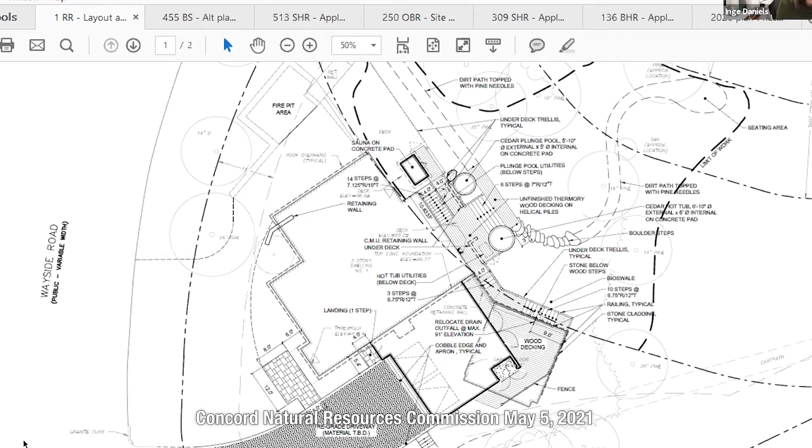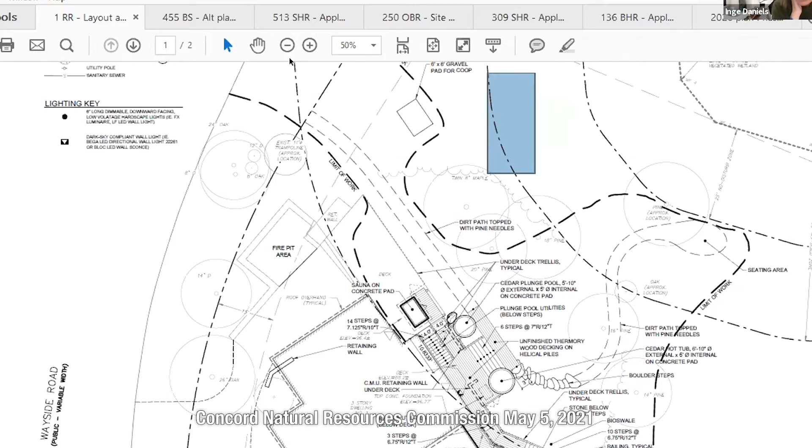There was a question regarding lighting. If you scroll up slightly, you can see the lighting that's proposed on the left-hand side, the lighting key. So we have lights on all the deck steps for safety. Those are downward facing, low voltage or dimmable hardscape lights. And then just a single dark sky compliant sconce on the back of the house.

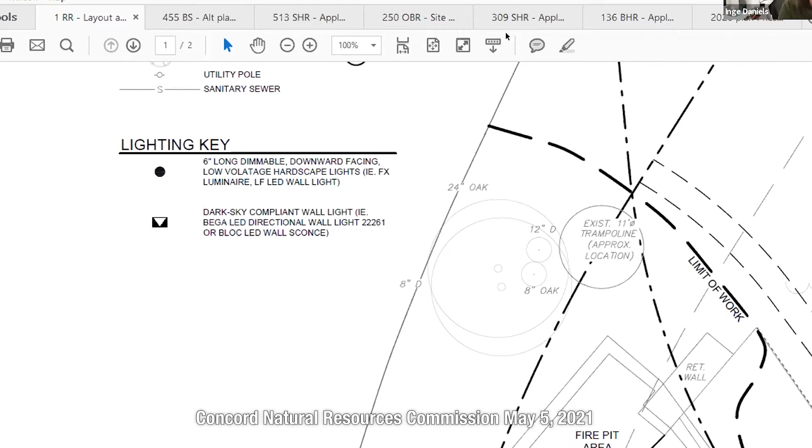Okay. And then I don't know if there are any questions regarding that. Otherwise, the other questions are addressed on the second plan. I apologize, Inge, I don't have your second plan up. Ooh, okay. So if you want to just speak to those changes. I can do that, or I can share screen, whatever the commission prefers. Yep, hold on one second.

Okay, so you should be seeing that now. So we were asked to delineate where we are finding invasive species. I realize there are a number of different colors and hatches and lines going on here, so I'll try to clarify those. The red pattern effectively is showing the invasive removal areas, which is not to say those entire areas are covered in invasives, but those are where we spotted them.

This area does show probably a pretty full extent, and that is multiflora rose. There's buckthorn in these spots and throughout this area, as well as oriental bittersweet and some burning bush. But it is not heavily - there's not a heavy presence of invasives.

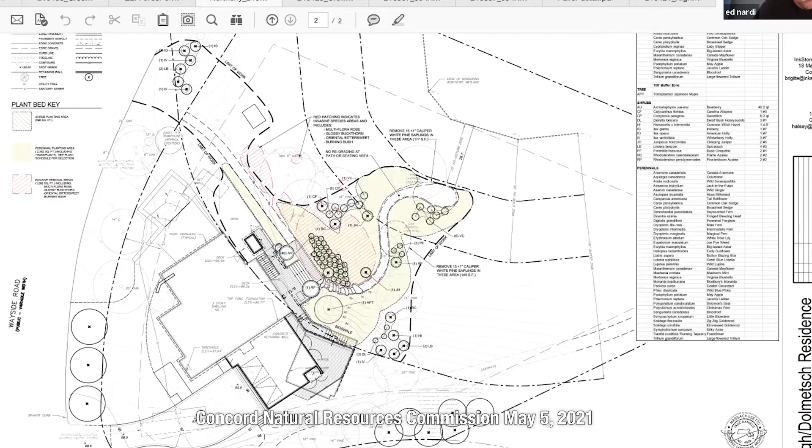I'm just trying to see if there are any other questions we were asked to address. We adjusted the white pine sapling areas so that it was very clearly outside of the 25-foot no disturb zone. Were there any other questions? From what I can see in terms of the notes, it seems like that captures the questions that were raised last time.

Great, great. Ed, could I ask a question? Of course, sure. Inge, can you stop sharing your screen? Yeah, thanks.

So this is a question from when we went down and looked at this wetland boundary for the first RDA - I apologize, I'm just remembering this now. This is the edge of the pond, essentially the edge of the wetlands. I think from the prior homeowner, there are some trees that have lights strapped to them that are projected onto the pond. Are those active lights?

I don't believe so. Okay, could those be removed? Those could be removed, I will check that with the owner. I don't believe they're active. Let's see, so...

Commission, do you want to consider making that an additional condition on this, to have those lights removed? I know the Commission is ready to issue the permit tonight. You may not have had the opportunity to speak with your client, Inge, about this, but there's no benefit to the wetlands and the wildlife to have this pond be lighted.

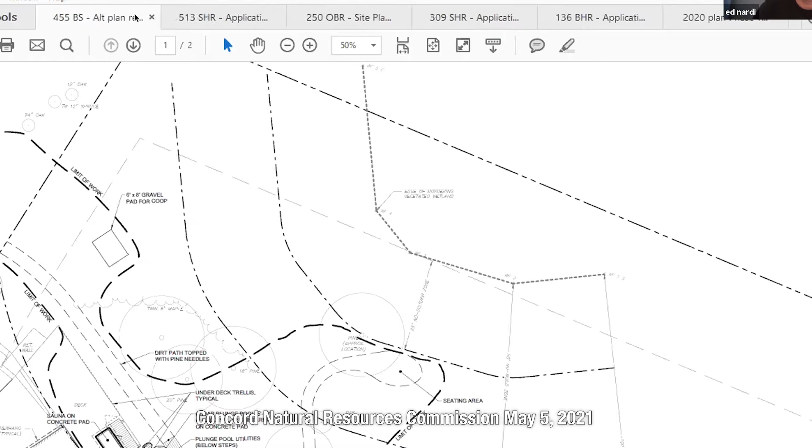New applications. First one up, notice of intent, 455 Bedford Street, DEP file number 137-1561. Let's see. Oh dear. And is Kristan First?

Yes, Kristan. Good evening. First. Hi. That wasn't the drawing. Hi, Kristan. I'm sorry, I closed yours mistakenly. Let me just open it and you can go ahead and start introducing the project.

My name's Kristan First. I'm a landscape designer, and I'm speaking on behalf of the owner of 455 Bedford Street, Stacy Mock. The purpose of this project is the construction of a new pool and patio. It will also involve the removal of invasive species adjacent to the wetland, replanting the area with native plants, and establishing a more robust planted buffer between within the 25 and 50-foot no-build zone.

The majority of this property lies within the 100-foot buffer zone, identified by the bordering vegetated wetland boundary. The wetland, which is town of Concord land, was recently delineated by David Burke, and it is predominantly a cattail marsh. The adjacent wetland is also listed as an estimated priority habitat of rare and endangered species, but this designation stops at the property line.

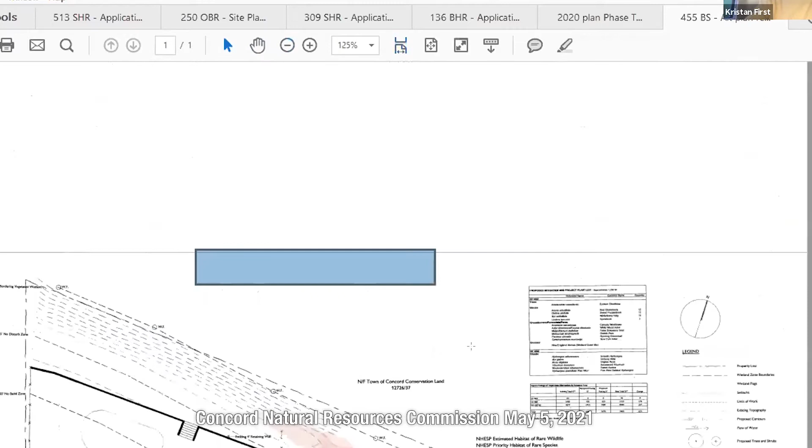We did explore several alternatives for locating a pool. We were limited by setbacks, 15-foot setback on the side and a 20-foot setback in front. There is an existing septic system in the front of the house. So the 2 areas we were looking at for locating the pool both involved some impact of the 50-foot no-build zone.

So we're looking at this project as a replacement and reduction of existing site interventions in the 50-foot no-build zone. So what you're not seeing here on this plan is the existing conditions on the site, but can you see my cursor at all, Delia, or no? If you want to share, go ahead, Kristan. So you'll have to open it if it's open on your screen, then you can share it. Okay, not that one. Sorry.

Okay, what I'll do, I'm just going to share sort of an existing conditions drawing. See if this will work. Sorry, I'm not as familiar with this. I can pull that up for you. There, I have this. Share.

Okay. These are sort of the three areas we looked at. Our initial proposal to you was looking at this area over here, but now as we're presenting, we're looking at this area here as the preferred alternative. But as you can see, both of these do lie within a portion of the 50-foot zone, but there's an existing driveway here that is quite large. So now we can go back and look at your drawing.

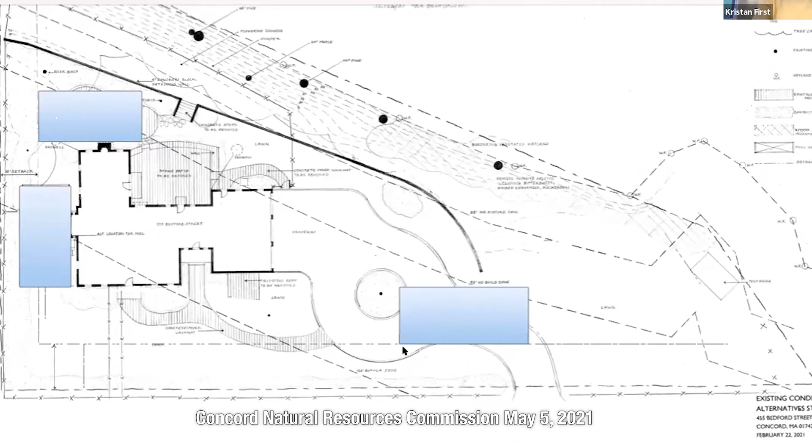Okay, so we've located this here. The pool sits exactly at the 20-foot setback, and just a corner of the pool, the patio, lies within the 50-foot no-build zone.

And then we're significantly reducing the size of the driveway in the 50 to 100 foot area, and the pool lies within that area. Another thing to consider is that the structure of the pool itself lies outside the 50-foot no-build zone.

Although this plan involves a reduction in impervious material, we're still proposing an extensive mitigation plan. Currently, the lawn rolls right up to the top of the bank, into the 25-foot no-build zone. We're proposing removal of invasive species, including barberry, winged euonymus, multiflora rose, buckthorn, and a large patch of Japanese knotweed.

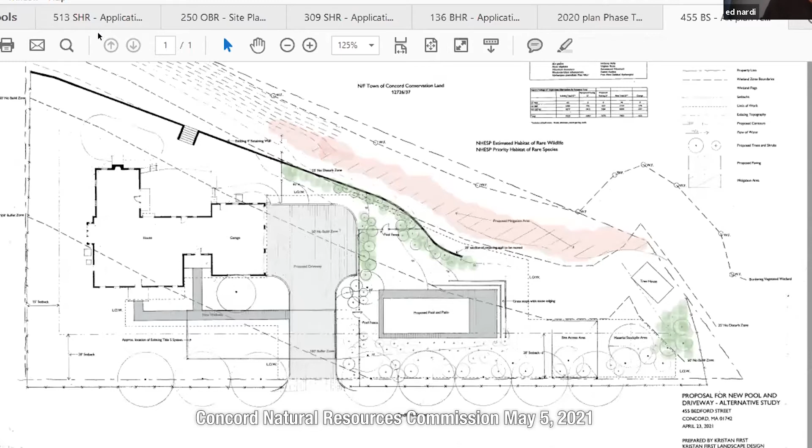Jeff Davis. Good evening. So I am here, as mentioned, for the request for determination of applicability. I should say, I'm Jeff Davis at 513 Strawberry Hill Road. Thank you.

I'm looking at the southeast corner area. It's a low-lying area, and we're trying to get this determination on whether there's any connection with the jurisdictional wetland that borders the property on the south. We had Hancock Associates evaluate that area, and they determined there is no connection, which is why I'm here. Thank you - I didn't have any particular comments on this application. Any of the commissioners?

Any public comment regarding the application?

From a staff standpoint, we confirmed that there is an isolated basin that has wetland soils and wetland plants. It is separated from the bordering vegetated wetland by an upland strip. There was no hydraulic connection observed between the two, confirming that this would be an isolated wetland.

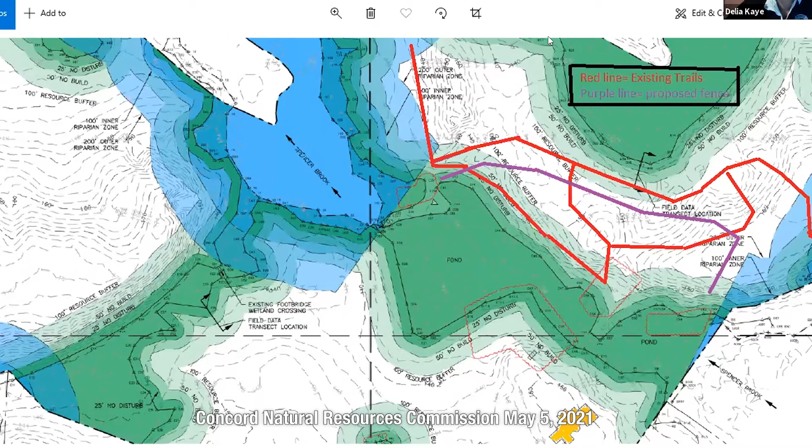Any commissioners have any comments or observations? Anyone from the public have any comments in regard to this?

I would make a motion, and I thank the landowners for keeping the trails open to the public. Yeah, exactly, thank you.

I move to issue a negative determination... we need a fence in here, you need the dog whisperer, I don't know if he trains, he must have just eaten dinner. I make a motion to issue a negative determination numbers 2 and 3 for RDA number 21-8.

Have a second? Thank you, Nick. We'll take the vote: Nick, aye. Judy, aye. Greg, aye. And I am an aye as well. Thank you, guys, appreciate you showing up and taking care of the fencing and the trails. Thank you.

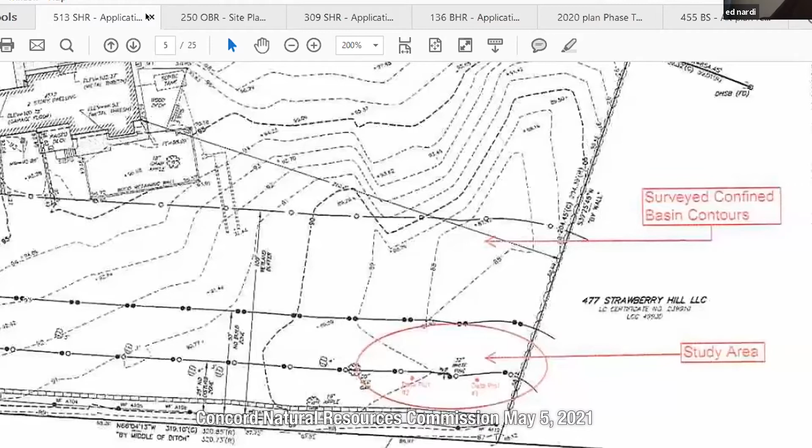Obviously this is a new development, and it seems like there are a lot of components to it. I'd offer some advice that any public comment be limited to the NRC's purview. There are a lot of different pieces, and different departments like planning, DPW, et cetera, will be opining on other major components of this application. So with that, who'll be presenting this evening?

Hello, Molly Obendorf for the record with Stamski and McNary. I am also here with Pat Nelson, Executive Director of the Concord Children's Center, and Brooke Cash, one of the landscape architects for the project with Lemon Brooke. Brooke actually has a slideshow, if we could pull that up.

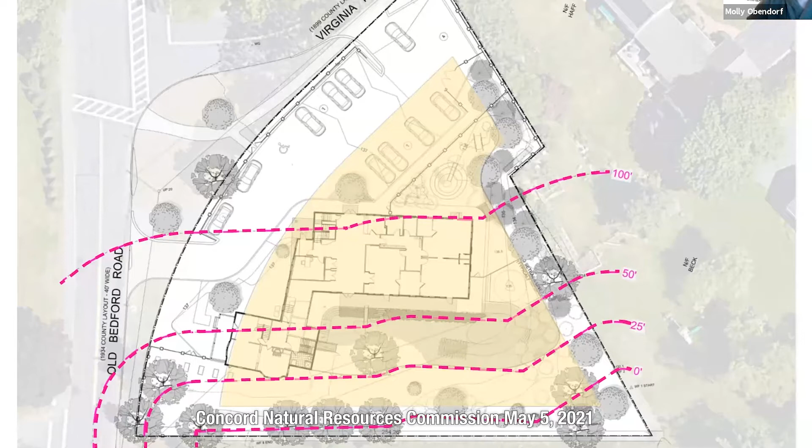We are also proposing a significant amount of plantings across the site—Brooke will get more into the planting restoration. Here you can see the infiltration chambers underneath the parking lot, shown as dashed lines. Those are fully outside the buffer zone, but worth mentioning because the building is within the buffer zone and we're capturing the entirety of that roof runoff. So in terms of stormwater, it'll actually be an improvement to the site, mitigating that runoff over land.

And then I will just brief over the open space areas, and I'll let Brooke get into more detail with that. But the site is constrained. We have the wetlands and we're trying to fit the building and the parking lot on here.

So the remaining open space is mainly being utilized for play space. There's a play space in the front, in that triangular area between the parking lot and the building, and then there's play space in the back. The site is handicap accessible, so there's a ramp in the back down to the play space area that makes that area accessible.

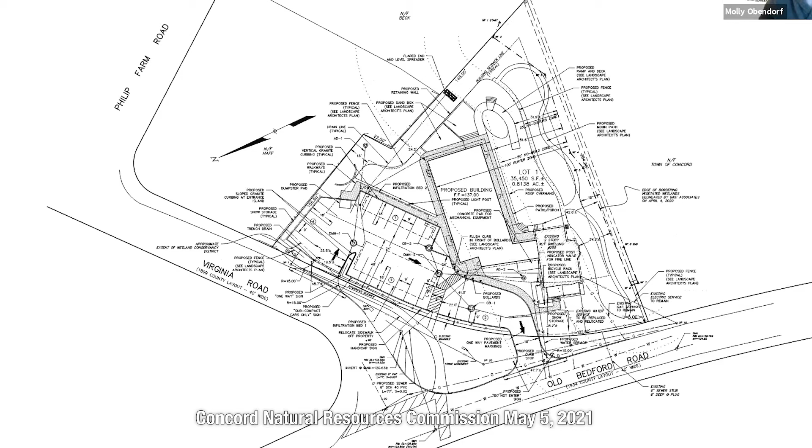Between the edge of the wetland and the 25-foot, as I mentioned before, this is fully disturbed. It's all lawn. Brooke and her team at Lemon Brooke have put in a very thoughtful amount of time and consideration into restoring this area, not only this area, but other areas on site as well. Particularly this area that is currently disturbed will become a natural meadow with a small mown path, a nature path for the kids where they will be escorted and safely taken through the site. I'll hand it over to Brooke to get into the plantings.

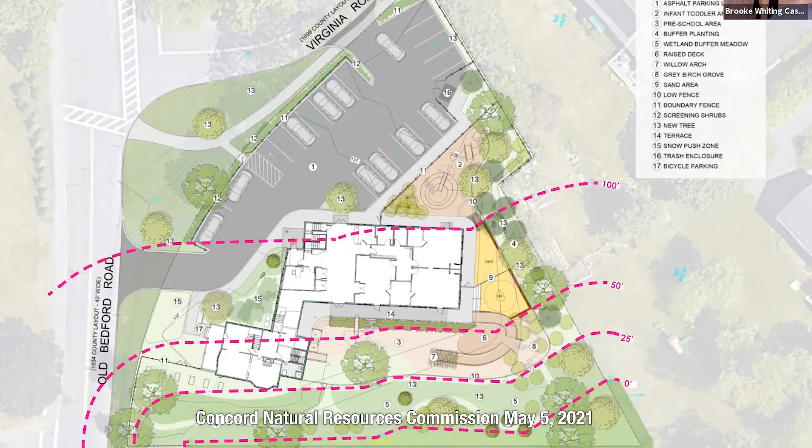We've worked hard to come up with an entirely native planting palette that helps provide educational opportunities, satisfies the buffering concerns for the neighboring properties, but also looks to restore and rehabilitate the wetland resource on the project. As Molly said, it's entirely lawn and tall trees at this point. The lawn does even stretch into the wetland itself.

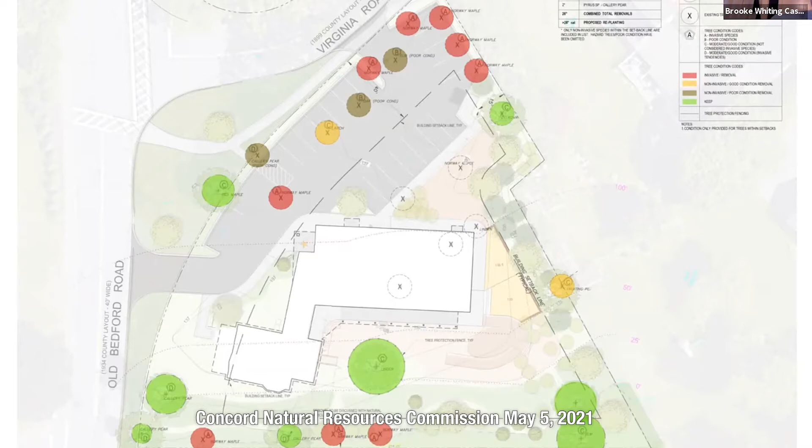We are trying to provide some woody planting in this meadow area to break up and provide additional habitat resources, but managing a lot of woodies interspersed in a meadow area is difficult. We have a lot of experience establishing seeded meadows.

It's not easy, but we're pretty well versed in what it takes to do that. So the intention is that that would be a native New England flower and grass meadow, mown probably once or twice a year to keep woody invasives out as a management strategy, with a mown path through it. The location could be set or flexible if you had a preference. The idea is to provide an opportunity so that supervised children could be taken out in small groups and walk through there.

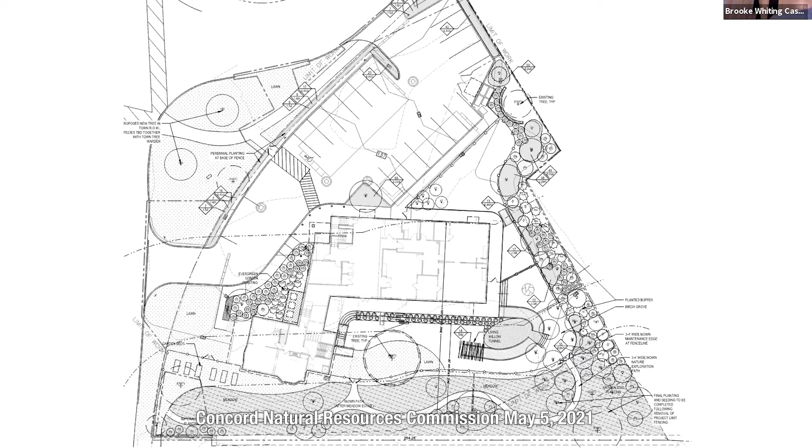We've put in plantings that have different leaf shapes, different kinds of bark and berries, and different opportunities to teach the children from the plantings in the landscape. This is not an extensive list. This is the trees - I have another slide with the shrubs - but it's all native material.

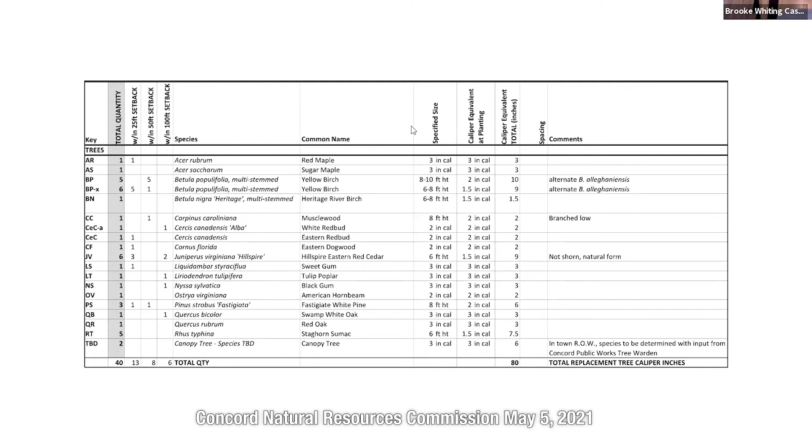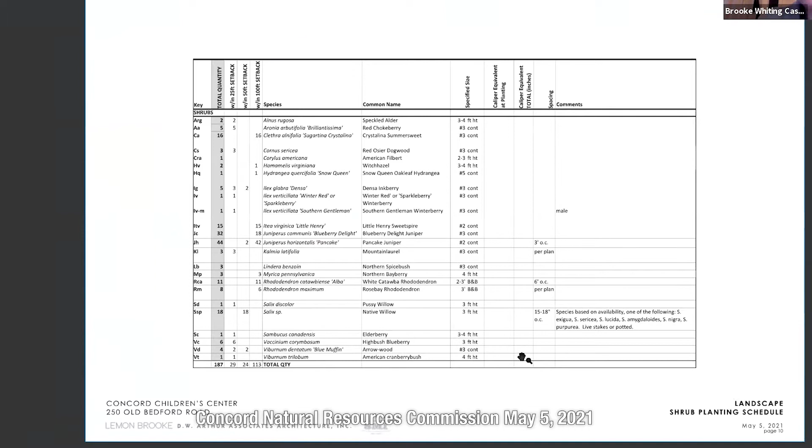We've gone through to compute what's being planted within which area of the setback, and - excuse me, sorry, another computer malfunction - we've gone through to do a tabulation of replacement caliper inch as well, and we are far exceeding the number of inches of caliper that we are removing outside of the maples. Again, I am having computer issues.

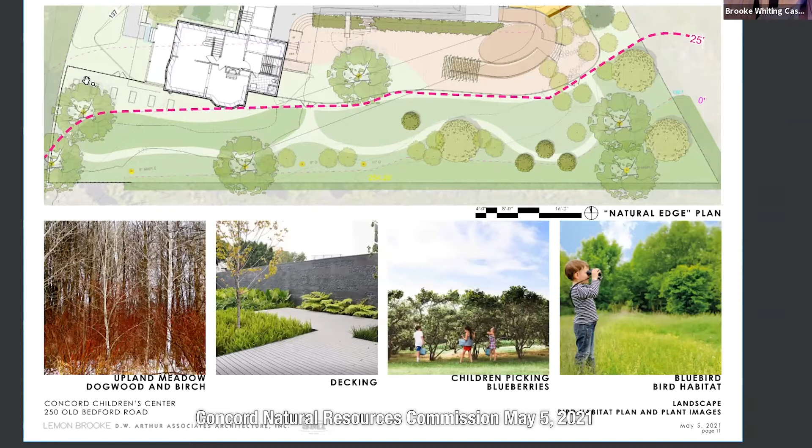This is outside of their play area, so this would be a limited use, supervised only, small groups of children. That's what these rectangles are here.

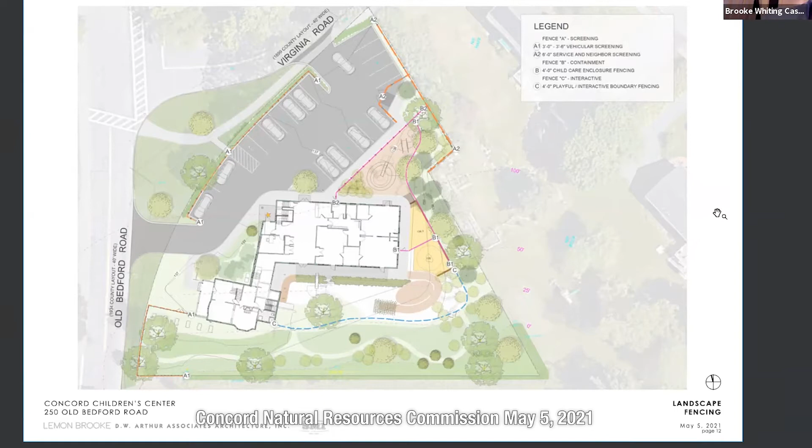And then this is about the fencing. This was a slide produced for planning. Really the fence that is of greatest impact is this blue fence C, which is along the 25-foot, just outside of the 25-foot zone. And then this one marked A1, which at this point we are considering to use the same fencing material as C. The primary intention of that would be split rail with a coated wire mesh on it.

One issue that we do have with the fencing requests or requirements of the NRC is lifting the fence off the ground, and there is an entrapment issue with small children with that. So that's not something we believe we can provide - that gap at the base of the fence - based on childcare licensing requirements. So that's an issue we want to be upfront about and get out there, because there are child safety issues that prevent us from providing that gap under the fence.

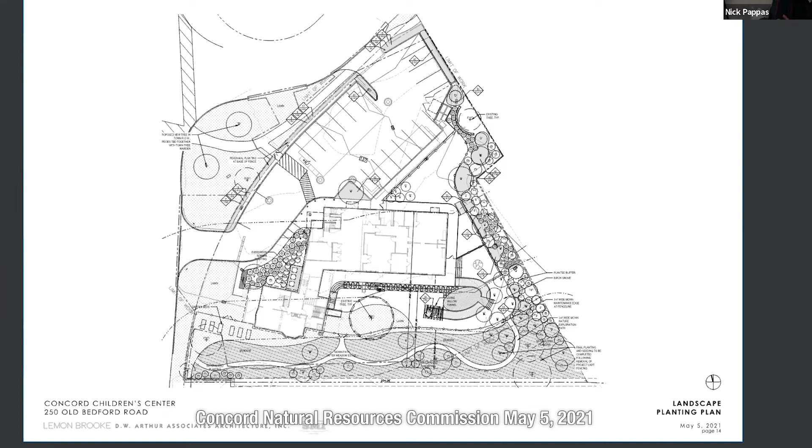My primary concern is about the extent of the impervious area, including the building and the parking area inside the 100-foot buffer. This area has a long history of flooding and failed septic systems that led the town to agree to extend sewers into this area, and that's a concern with that much impervious surface. I heard that something would be done to allow water to infiltrate, but given the history, and given that there were drainage ditches there to deal with this problem that don't function anymore, I have concerns about that.

I can speak to that. Runoff over impervious area is always a primary concern, which is why we're mitigating it. There's always a concern of increasing the groundwater table, but it's the same amount of rainfall on the same amount of area - it won't increase any existing groundwater problems or contribute to existing issues. The drainage structures are holding our distance to groundwater, any required setbacks to property lines and buildings, to provide a safe means to infiltrate that water and have it percolate into the ground properly. So we are abiding by all the regulations and mitigating the increased impervious area with those structures.

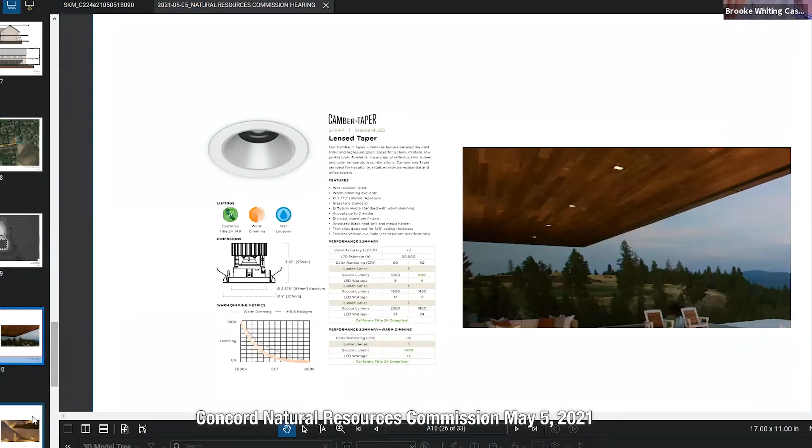This slide shows the soffit lighting, that's where we have porches. And then this is the lighting for egress where we do not have a porch to light down from. So these are all full cutoff fixtures, and they really are not projecting light very far at all beyond where we need it for safety.

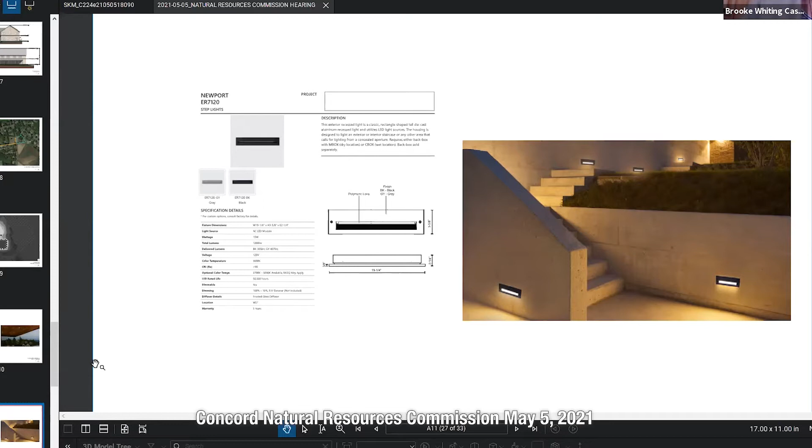Is there an intention to operate this after dark? Or what time? In the wintertime, how late does it run? They're open until 6:30... actually, no, we're only open till 6. So there may be cleaning people or others there later, as long as there are people occupying the building, even if it's for maintenance, for safety egress we do have to provide the lighting around the building edges, but they're not there all night.

There's an opportunity to set some kind of programmed schedule. I would imagine, speaking with the architect, that would be possible. So the lighting will have a timer ability to set back after hours. It can, it hasn't been designed yet.

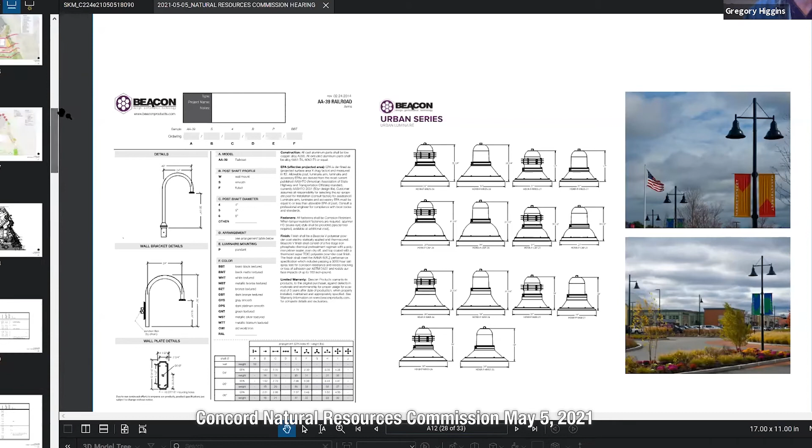One more question on the drainage, the roof drains and that. I'm sure you used conventional authorized calcs, but we know from experience that you have flash floods and heavy rains. Do you have an outfall for those structures should we get a deluge of two inches in an hour? And where would that water go?

Yes, so there is an outfall, let me go to your plan that has that. So there's, yeah, right there. So that services the larger infiltration bed. Engineering did have a comment to provide one also for the smaller one that's servicing the roof drainage. So this will overflow into this level spreader, so it's not just a pipe discharging. It's a channel, for ease of words, that will fill up and then slowly overspill, and then eventually go into the wetland.

And I'll add that there's significant treatment for all of this runoff from the parking lot. There's about 90% removal of total suspended solids before it even enters the infiltration bed, and the infiltration bed provides additional treatment on top of that. So whatever outflow comes from that overflow pipe and level spreader will be fully treated, clean water, and it's right outside the 50-foot there.

This is somewhat related to drainage, but also just the amount of coverage on the lot, specifically in the jurisdiction. What was the basis for the sizing of the building and the parking lot?

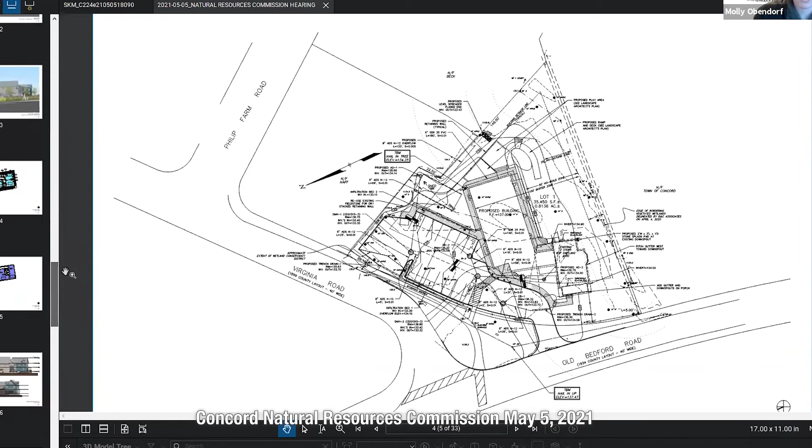And then the size of the building, maybe Pat could speak more to this, but I know there are specific sizing requirements for classrooms and providing a certain amount of space. This is actually a smaller building than what was originally considered, so it's already been reduced in size to the absolute minimum extent that it can be.

So maybe to that point, it might be helpful to understand how this proposed building relates to the existing programming at the Concord Children's Center. If this is an expansion, similar conditions, or a reduction, that would be helpful for me to understand. What's going on right now?

This is the program currently at Ripley, 0.2 miles down the road. The school district has decided they need that space and is no longer leasing it to the children's center. So the children's center looked throughout town to find a property that could suit their needs, and this is a build-to-suit facility. It is no expansion of additional children.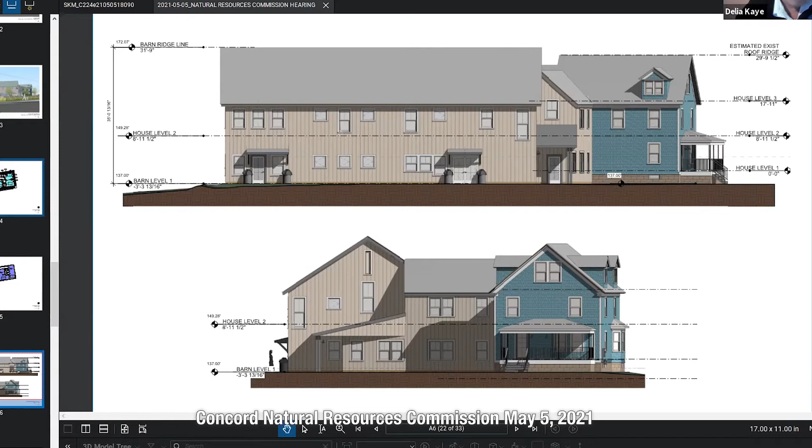Okay, so I think it might be helpful just to understand - I only ask this because there is that intrusion into the 50-foot no-build zone, and I saw your architecturals with the spacing in terms of, is it 45 for, I don't remember what it is for different, 42 for different, preschool, COVID, whatever it is.

But let's not look at COVID. Let's look at what it is going to be in reality, hopefully, knock on wood, very soon - what those numbers are for how many students you have.

I think if there's a way to reduce the amount of massing that you're bringing into the 50-foot no-build zone with that very small accessible entryway, that would be great. It would be helpful to have that on the next submission.

I'm not totally understanding the differentiation. If you're going into the no-build zone, we'd like to see an alternatives analysis - is that a necessity, or is there another way of finessing that so you don't have that incursion into the 50, or as big a one?

Right, and I think that's what she's driving at - is the quantity of children the same, and is the size not expanding beyond what you currently need, so that you're not expanding your program? Because if that were the case, that would be a way of mitigating going into the 50 - you could make the building smaller. So just take a look at whether there's a way to take that out of the 50 or reduce it.

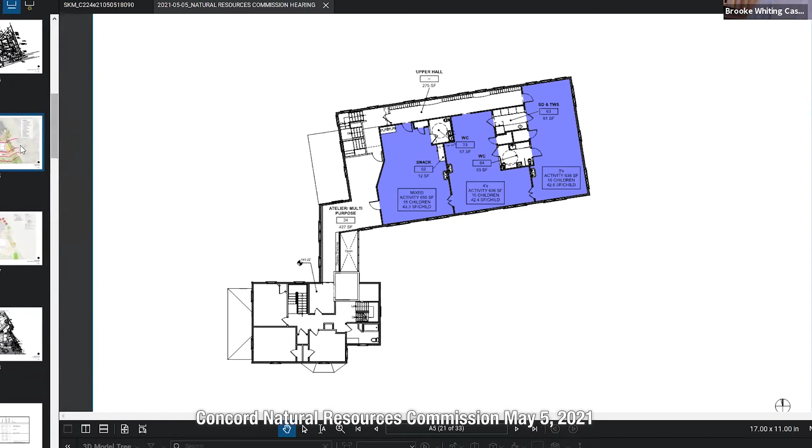Right, so let me go back to the landscape plan - the accessible entrance is in the 50. That's correct, and all of this is being driven by the size of the building and the size of the parking lot. So the commission's interest is not having new incursions into the 50.

Right, we understand that. The size of the ramp is not related to how many people are in the building - it's related to how much grade change we have to make up, and how long of a ramp you need to meet ADA.

But could the ramp take a different configuration, starting at a different edge of the structure? If the structure were smaller, you'd have less ramp going into the 50 - it's just geometry. And the ramp could also take a different configuration outside the 50, towards the back of the property.

The issue is there's designated play space that's required - there's a square footage per child for play space required. Moving the ramp or deck would take away from that play space. And I don't think reducing the building is an option - it's pretty much at the minimum required size needed for this program.

But I can just leave it at - Brooke and I can definitely look at the ramp, see if there's any way at all to minimize the encroachment into the 50 ever so slightly while still functioning as an accessible route. Right, you may find there's nothing you can do about it, but you do the alternatives analysis and come back and say we tried this and this, and it didn't work.

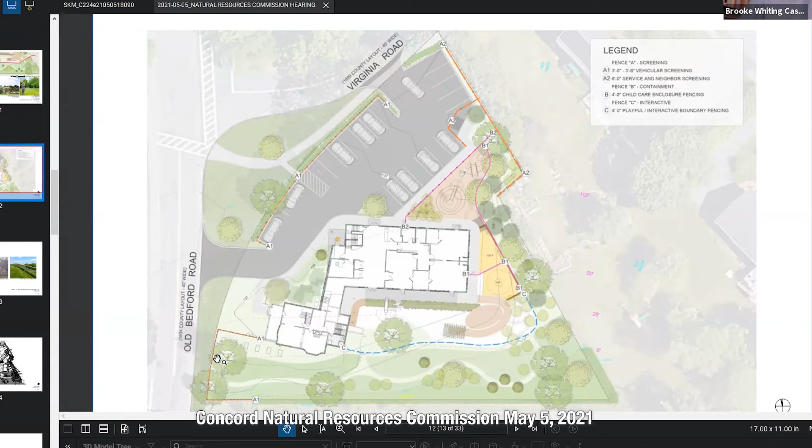Can you also potentially look at pulling that up so that the bottom part on the south side of the lot—if you could pull that up—I think that's in the 25-foot, if that doesn't need to be there.

The interest is at where the label A1 is—that's really where the ditch starts. That's a very visible signal to the children that you don't go beyond there. What we're trying to do is provide a very clear, unambiguous boundary for children, who would be in small supervised groups, but out in this area, they're very small children, and Old Bedford is a busy road. So that's been the interest in trying to return that piece of split rail fence back.

So what if you flipped that fence and came off the back side of the building to the east, to the right of the gardens? You know where the gardens are—those are the rectangles here. To the right-hand side of the gardens, you have the fence on the right-hand side of the building. You start it up at the gardens and bring it to the left and down to that point, so there are ways you could look at the fence and keep it out of the 25.

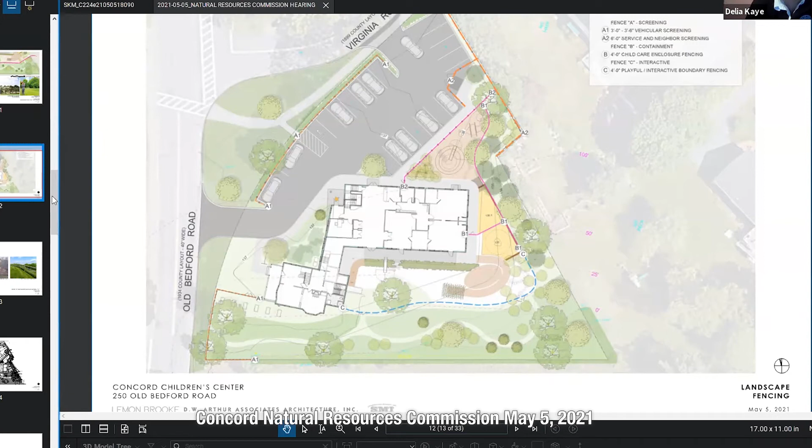So that is included in the plant schedule, the replacement values. Are you interested within the 100 or just within the 50? Which trees are being removed, the 100? I can go back to the slide.

So that's, I think, what Judy's looking for is an arborist's recommendation on why those trees are coming out, because there's a lot of X's on the plan, but not a lot of justification for why. So this is the 100-foot boundary here.

So these three trees are within the building footprint. These are Norway maples. We don't have to take them out. We're offering to take them out.

So just to provide that, Brooke, in writing would be really helpful to have for the record. Okay, I think that's somewhere in the narrative, but Molly and I can confirm that.

And then this is a fruiting pear that is in the location where the level spreader is going to go, and that's why that one would be coming out. Okay, well, we'll put it in writing and provide the chart as well. Thank you.

So we'll move to the public comment. Any public comment on this application this evening?

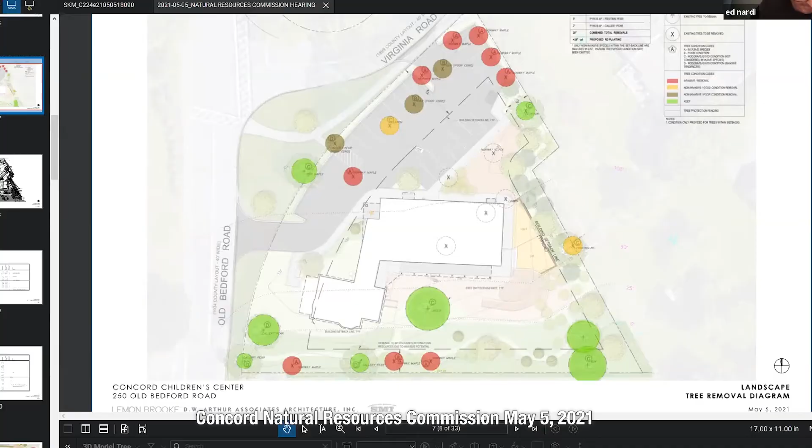Hi, this is Michelle Beck. Can you hear me? Yes, Michelle, name and address, please. Sorry, we are at 26 Philip Farm Road. Thank you. We're the direct abutter behind.

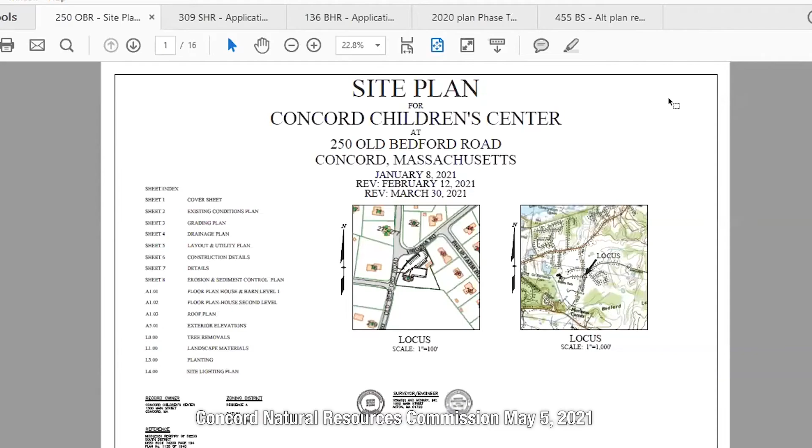We have some commentary on the scope of the project with the large percentage of impervious surface. I'd like to better understand the distribution of space types with the existing home compared to the addition, and how that relates to the space types from the locations they're moving. For example, the existing home seems to be proposed to be used largely for administrative purposes, as opposed to programming purposes. Is that consistent with the previous location? And perhaps if the building could be smaller, you could address some of the encroachment on wetlands.

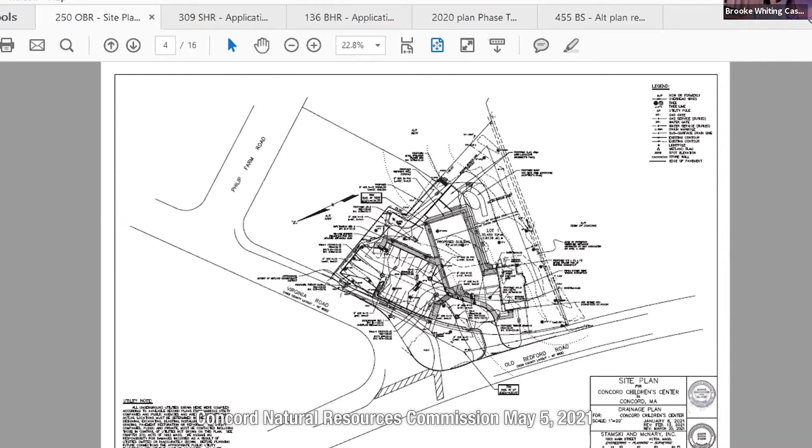I'm not the architect, but I can respond generally. Egress requirements and access requirements make it very difficult to use the existing building space for children's programming. That's why the majority of the classroom space, primarily occupied by children, needs to go in the new addition.

There's also, initially before COVID, our plan was to have a small after-school program on the first floor of the existing farmhouse so that it would be program space. It's up in the air now as to whether we'll be able to provide an after-school program, depending on whether the public schools will still transport children to the nonprofit programs after COVID. So more than you need to know, but that was part of the plan, to use the first floor for program space.

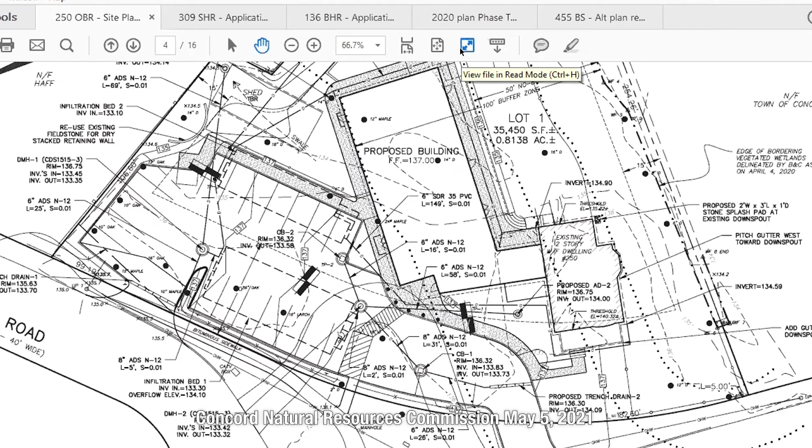My second comment, going back to, I'm not an environmental engineer, but where the flowering pear tree is and there's that water egress for overflow, you're removing the flowering pear tree, and the water overflow would go into our backyard. That part is higher than the rest of our yard, and the Haffs who live next door, their backyard is higher than ours. Every year at this time we have large puddles of water right behind our house, so I'm concerned about that egress of water into our yard. I'd like some better understanding of how that impacts the yard, given the large impervious spaces. I know the lawn is worse than the excellent plantings proposed, but I was curious to have more information.

Yeah, I can speak to that. There is a natural swale along that property line, and we're not raising the grade in that area. So I'm sorry to interrupt, but can you put that in lay language, I'm a healthcare person, not an environmental person, so I don't understand. So there's a channel essentially along the property line. It's natural, currently we're maintaining that channel, and we're not increasing the grade in that area enough to affect the abutting properties.

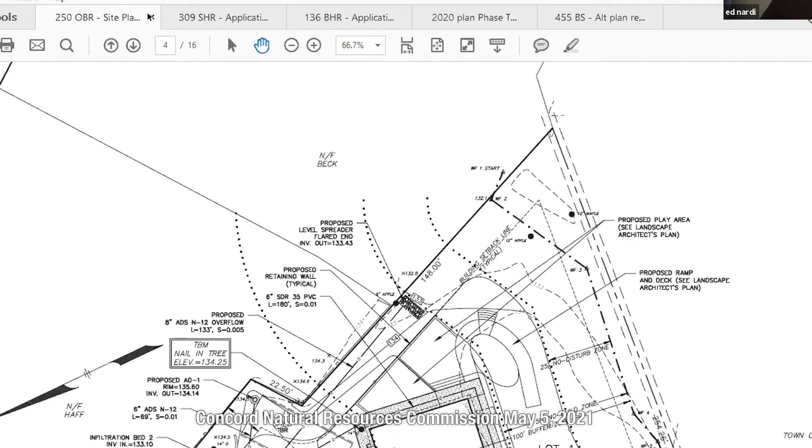All right, notice of intent, 309 Strawberry Hill Road, DEP file number 137. Delia, did we get a number or is that still outstanding? You're on mute, Delia. I'm sorry, I can't unmute when I'm sharing. We did get that, I don't have the number, Tom. I hope that you do.

Tom Hughes with Hughes Environmental Consulting, here on behalf of Dennis Fiore. Dennis is out there too, in case anything comes up where we need him to address. The DEP file number is 1371563. Thank you.

Dennis is looking to replace the barn, which has been in somewhat deteriorating condition on his property on Strawberry Hill Road. The existing barn has some trees growing right up against it. They were administratively approved for removal back in 2015, which was actually when Dennis first reached out to me considering the barn replacement project. He then put it on hold until 2019, just before the COVID stuff hit. So we're a little slow getting from 2019 to now, but here we are with the NOI to replace it.

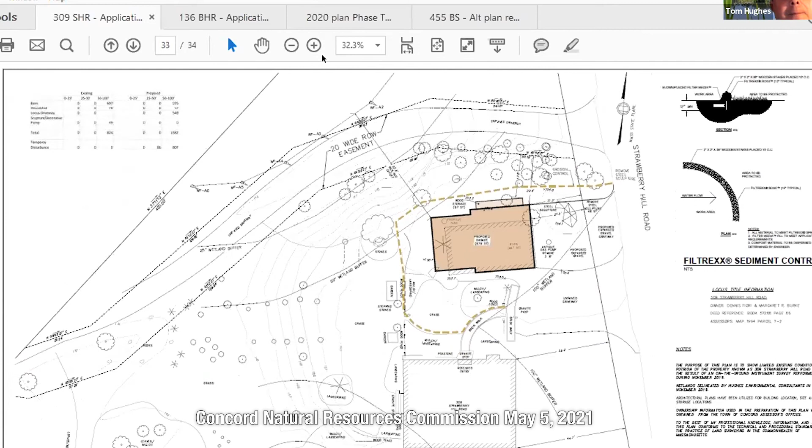That's no problem. If we can go back to the plan, Delia, it should be the second to last page. The file setup is for double-sided printing, which is why there are some blank pages in there. So the barn replacement is slightly larger than existing, but it's entirely outside the 50-foot buffer. We do clip in with the limit of work just to give enough room for the frost walls, which is a frost wall with slab for a foundation, so we give enough room there for them to work. But it's outside 50 feet. It's a pretty straightforward replacement buffer zone right up near the street.

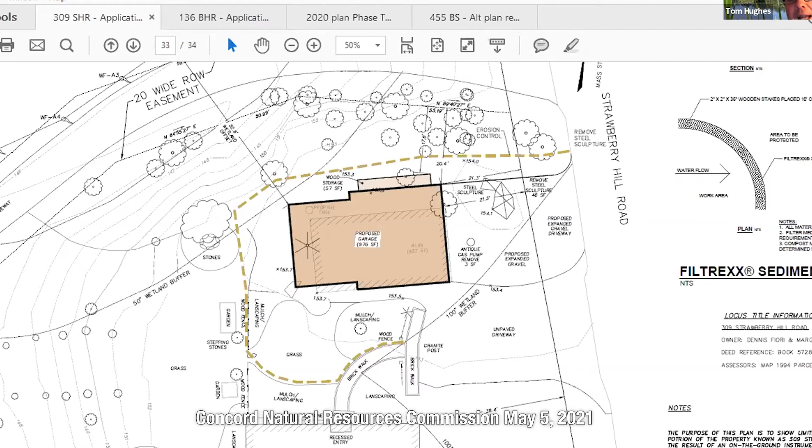There's a driveway that separates the site from the resource area. There is another wetland area that comes in just off screen down below, where I just placed a couple flags where it kind of got to its closest point, and you can see that area down there. That's kind of between Mr. Fiore's yard and the neighbor's garden.

Like I said, it's certainly a lot simpler than some of the other projects you've had in front of you tonight. What I'd like to do is get any additional feedback or questions from the commission. We'll update the plan and come back at your next meeting, hopefully with everything, all the I's dotted and T's crossed.

Thank you, Tom. I don't have any particular questions, commissioners. Looks pretty straightforward. Any comment from the public? Hearing none.

So Tom, you want to be on for next meeting, May 19th? Absolutely. We've got somebody going out either tomorrow or the following day to document all the tree stuff, so we should be good to go. Delia, when do you need that in by? Friday? This Friday? Yeah, to be on the 19th, just FYI. Yeah, we'll take care of that.

If for any reason we can't do it, then we'll ask for another continuance. That's fine. This is pretty straightforward, so if you need a day or two, we can work with you on that. But the deadline is this Friday, close of business. They're pretty simple changes, simple for us to review. So if you can't get it in by Friday, we can just reach out. I'll text the surveyor as soon as I get off the meeting.

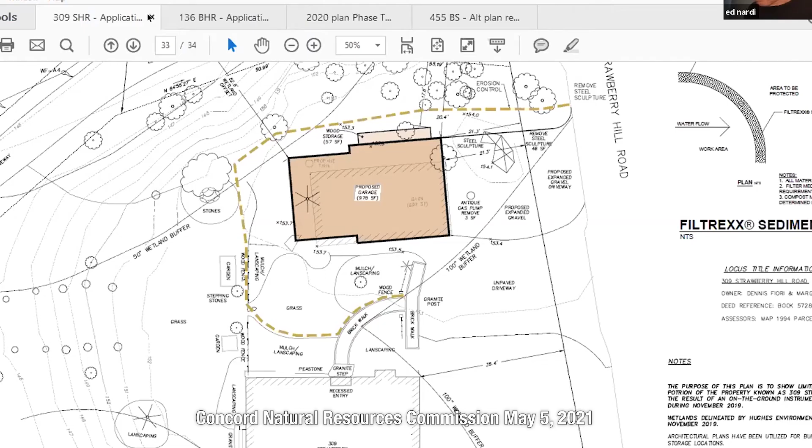Let's see, we have another RDA, 136 Barnes Hill Road, RDA file number 21-9. And he'll be addressing this tonight.

Hi there, my name's Terence Yeo, and along with Elizabeth, my wife, we're the owners of 136 Barnes Hill Road. We just bought it about 8-9 months ago from the Sears family, who were Concord residents for many, many years. I'm representing myself tonight.

Good evening. Good evening.

So you want to just touch on this a little bit in terms of what you're up to? Yeah, sure. So obviously we've bought the property. It's on 3.8 acres, bordering on Macomb Pond, just off of Barnes Hill Road.

Our thought process is that we're just going to take our time to work through the various different aspects of how we're going to develop the property. Our first goal is to get to a point where the house is livable, that we can enjoy it with our family. We've got a 1-year-old and a soon-to-be 3-year-old, and this is sort of a long-term project for us.

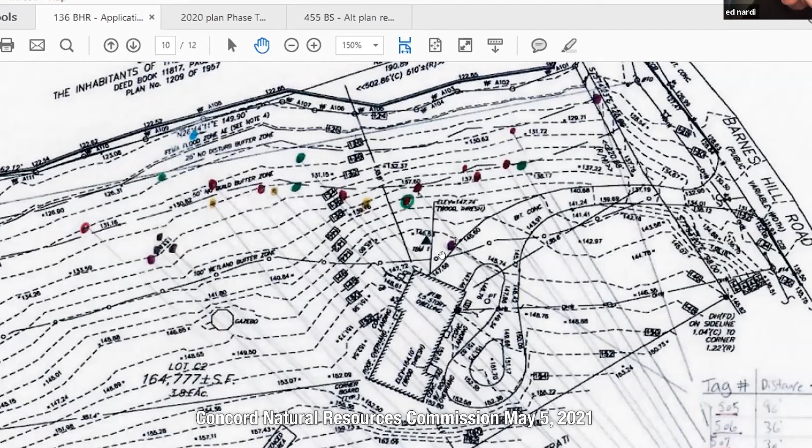They're outside. Yeah, there's this tree, I believe it's this tree, and one right on the 50-foot. I think it is this one, 510 and 513. They're flagged. John Coppinger did the flagging, and they're flagged. Delia wrote down, I think it's like you said, 510 and 513. So we know there's a flag and a number, and we'll only take those 2 down. Yeah, right, okay, that's what we understand the mission is tonight. Okay, thank you, Terrence. Great, thanks guys.

Any public comment on this application? Okay, hearing none, I make a motion to issue a negative determination number 3 with the following conditions: 1, a stake straw wattle shall be placed at the limits of disturbance. 2, a pre-construction site visit shall be held with department staff and the contractor to review the erosion controls and limit of work. And 3, after the project has been completed, the applicant shall submit a letter to the NRC stating that all work has been conducted in accordance with all conditions of the determination of applicability. Any changes from the RDA shall be described. This is for RDA file number 21-9.

Second. Thank you, Nick. And the vote: Judy? Aye. Greg? Aye. Nick? Aye. And I am an aye as well. Good luck on the 2 trees, Terrence.

And don't worry, we'll mail that to you so that you have it. Yeah, that'll go out Friday. That'd be really helpful. All right, okay, very good. All right, thanks guys. Thank you.

Okay, that closes off the hearings for the evening, and we have some emergency certification ratifications.

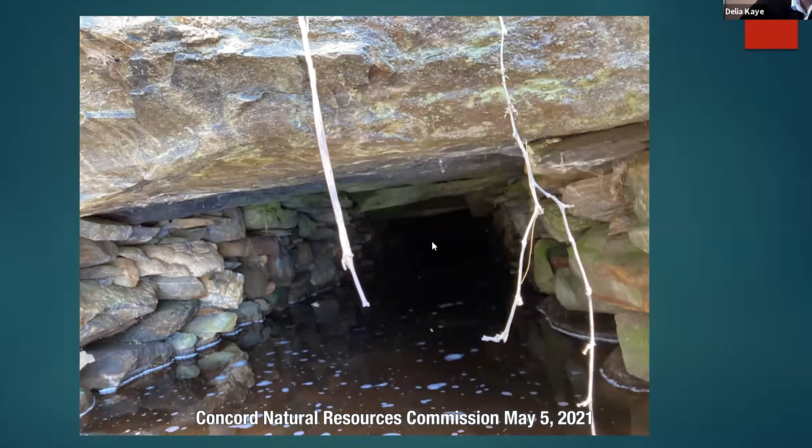So the initial emergency certification was to authorize the town to do this, which was basically just to wiggle a little bit of the beaver dam, right here, just to wiggle it loose. The beaver dam is about 8 feet below this level of water, and this is probably impounding about 20 acres, with a maximum depth of 10 feet. So it's a lot.

And how quickly did that happen, Delia? So this was on Thursday that the water backed up. It began last fall, and I remember driving by, but it was way, way lower. Then Ellen Emerson contacted me about two months ago, and it kept rising rapidly. I was just trying to get a sense of the time here.

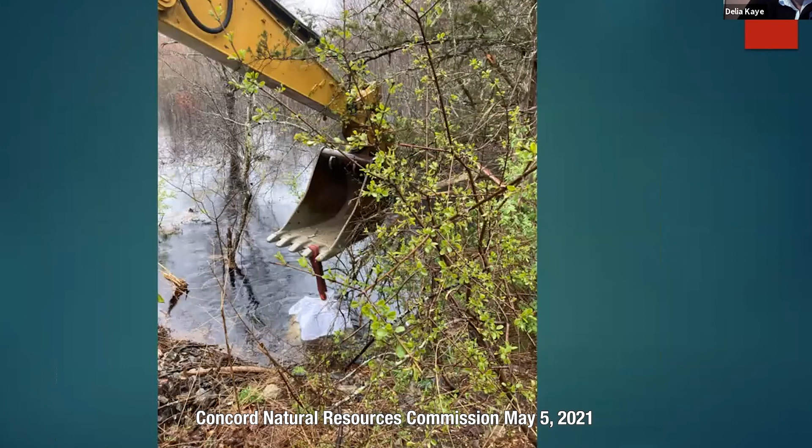Thank you. And so we ran into a little bit of a problem. This is a photograph of an excavator not removing trash, but actually putting down a gravel-filled sandbag, because I'm standing on Monument Street here, looking up to where the dam is. But what happened was the shoulder of the road started to slump.

Obviously a major concern was that there was going to be a catastrophic failure of not only the water main that went under Monument Street and the national grid line and overhead utilities, but of Monument Street itself and the culvert. So the dam got dammed back up again, and we went to plan C or D.

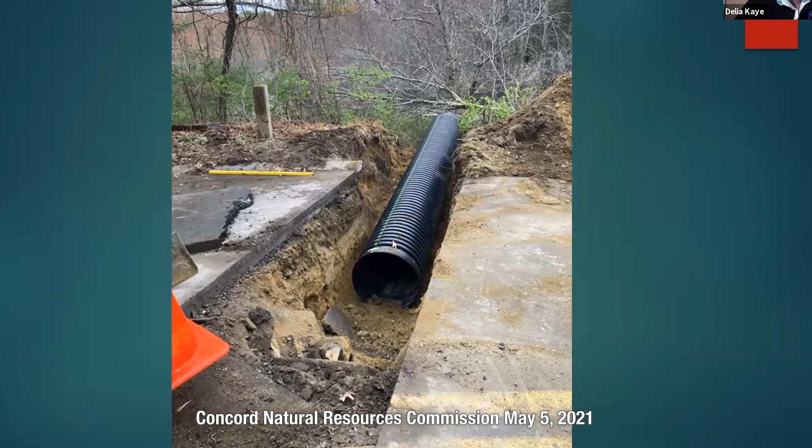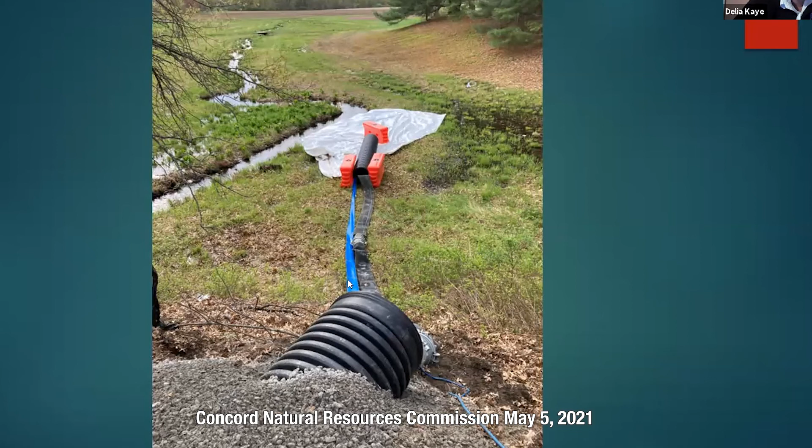This temporary bypass was installed over the weekend. It's a 24-inch HDPE pipe that a pump, actually several pumps, are going to be run through and have been run through. So that was the excavation done to allow that to be installed. This is now the 6-inch pipe, and that's the 10-inch pipe.

And this is a big tarp that you've probably seen if you've been out there. The pumps are being run into another section of plastic pipe. These are Jersey barriers here, filled with water, each about 700 pounds. The point being to run the pumped water through this pipe and discharge it.

So it basically banks off this Jersey barrier into this point of the field, the brook, Sawmill Brook, and then it goes under this. We've been watching this to make sure there's good freeboard—there's always been at least an inch—before it hits the farm field, which is about 4 feet above the brook here. The brook does a left-hand turn and then again, right towards the Concord River.

So this is with one 10-inch pump flowing. Exactly what we would want to see. It's looking really good, dispersing nicely. It's discolored only because the water coming through is a little bit discolored itself, but there's no sedimentation at all at the downstream end of things—no discoloration. This is just looking from a little bit further back.